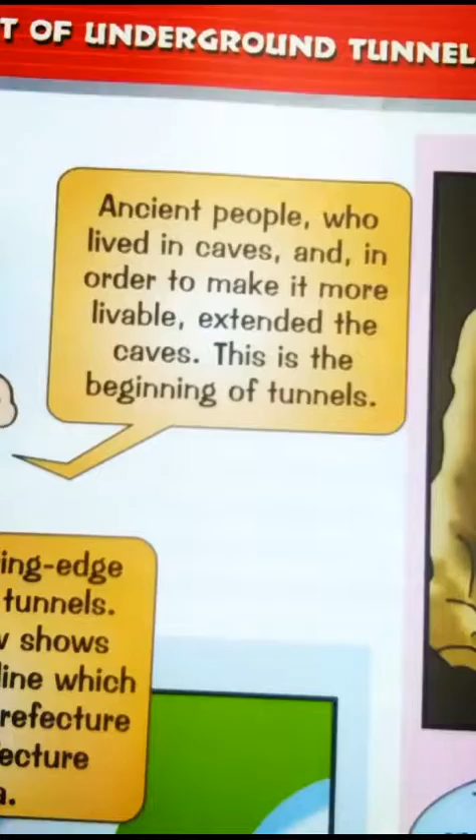Ancient people lived in caves and, in order to make them more livable, extended the caves. This is the beginning of tunnels. Since then, people have excavated tunnels in various settings. That was a cutting-edge introduction to tunnels. The chart below shows the Tokyo Bay Aqua Line, which links Kanagawa Prefecture and Chiba Prefecture across the sea.

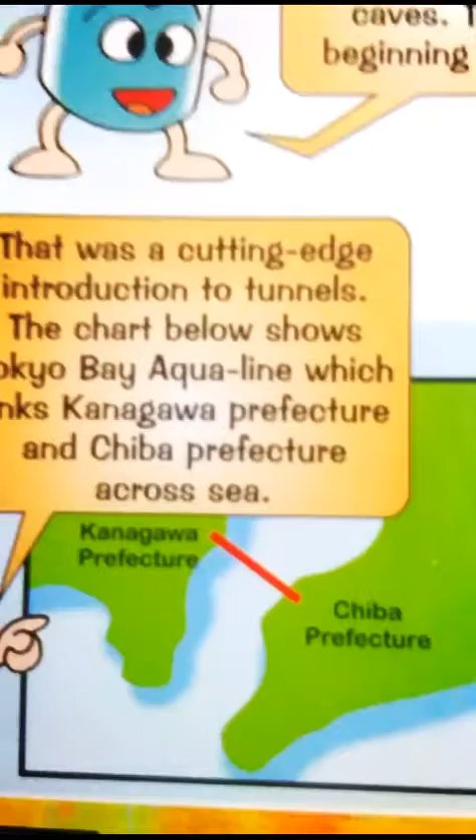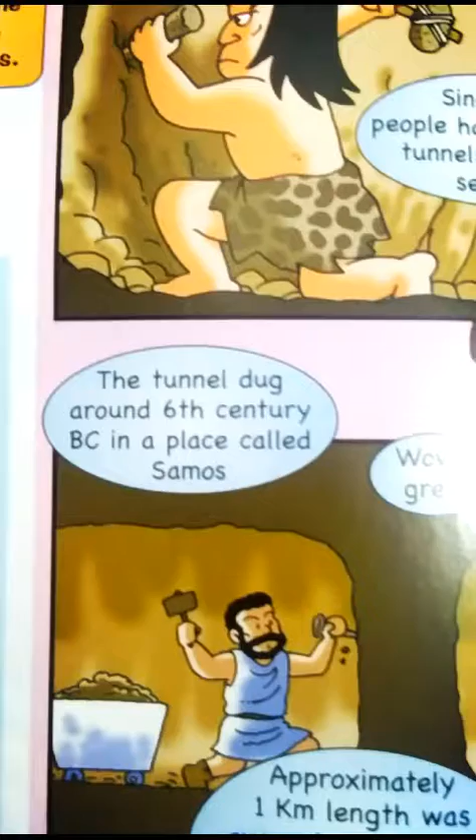A tunnel was dug around the 6th century BC in a place called Samos. Approximately 1 kilometer in length was excavated from both sides, which connected to each other perfectly. See the cross section of the tunnel. Not only roadways but also communication cables pass through the tunnels.

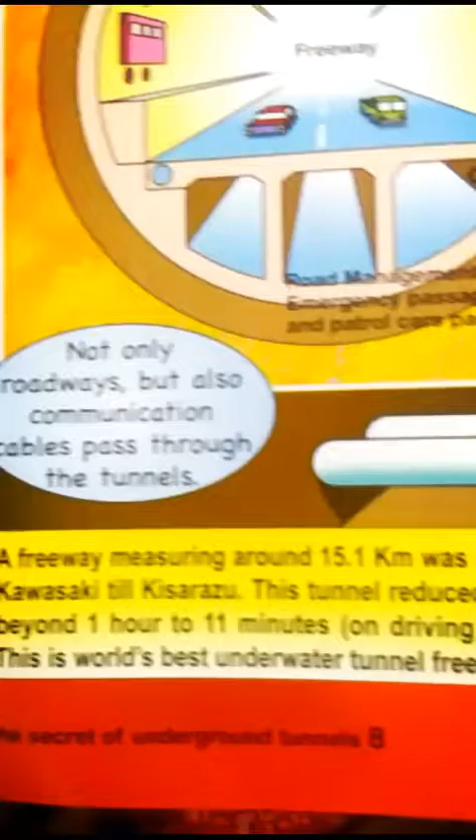A freeway measuring around 15.1 km was opened in 1997 from Kawasaki to Kisarazu. This tunnel reduced traveling time from over 1 hour to 11 minutes when driving at 80 km per hour. This is the world's best underwater tunnel freeway.

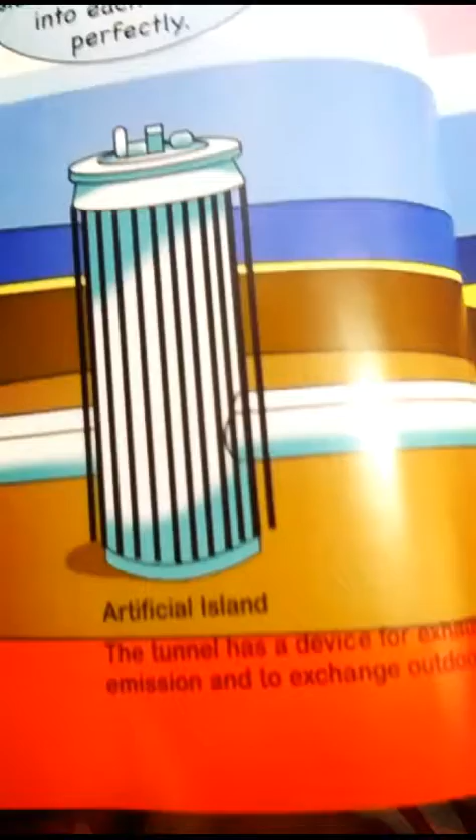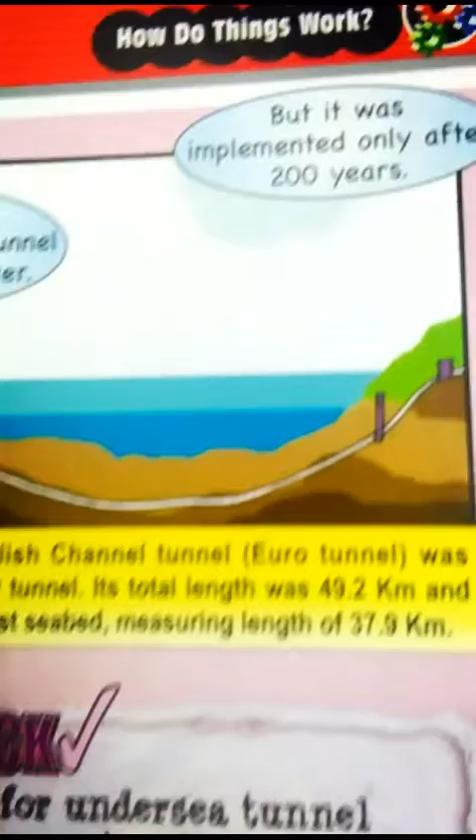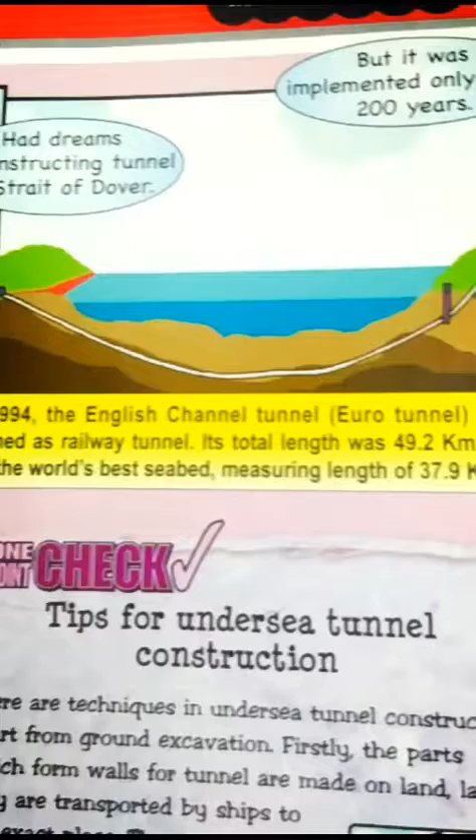French Emperor Napoleon had dreams of constructing a tunnel in the Strait of Dover, but it was implemented only after 200 years. In 1994, the English Channel Tunnel, Eurotunnel, was opened as a railway tunnel. Its total length was 49.2 km, and it is the world's best seabed tunnel, with an undersea length of 37.9 km.

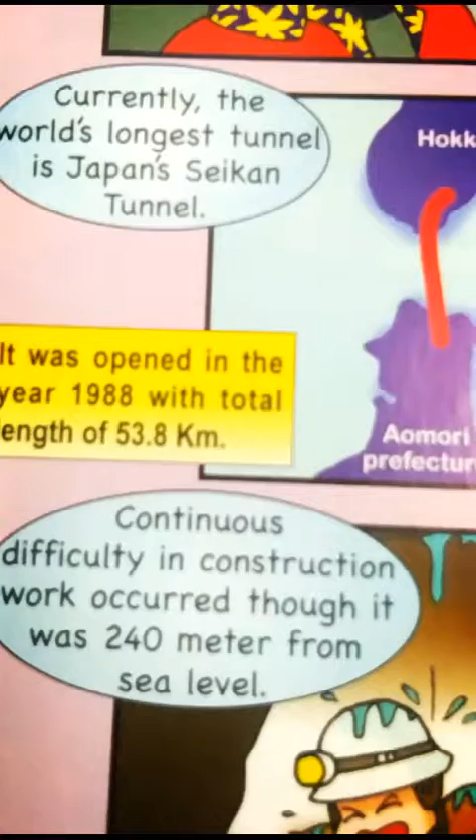Currently, the world's longest tunnel is Japan's Seikan Tunnel. It was opened in the year 1988 with a total length of 53.8 km. Continuous difficulty in construction work occurred, as it was 240 meters below sea level.

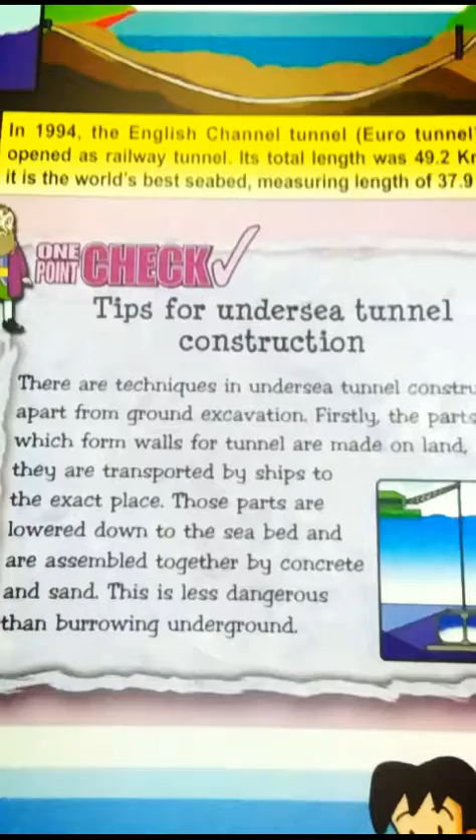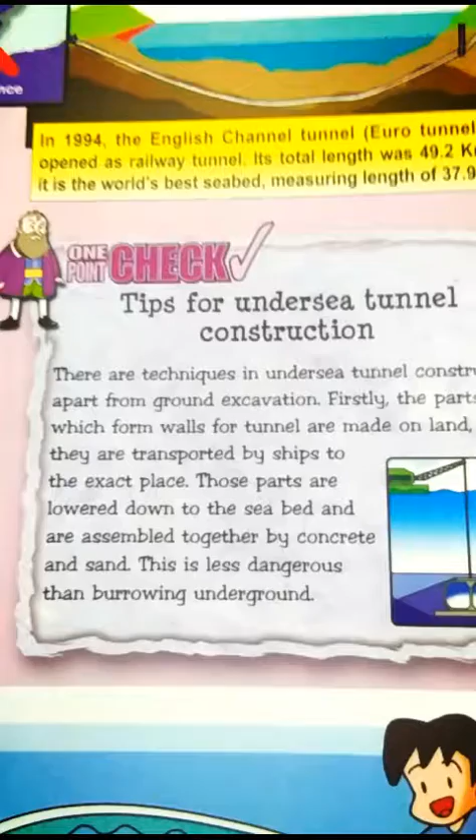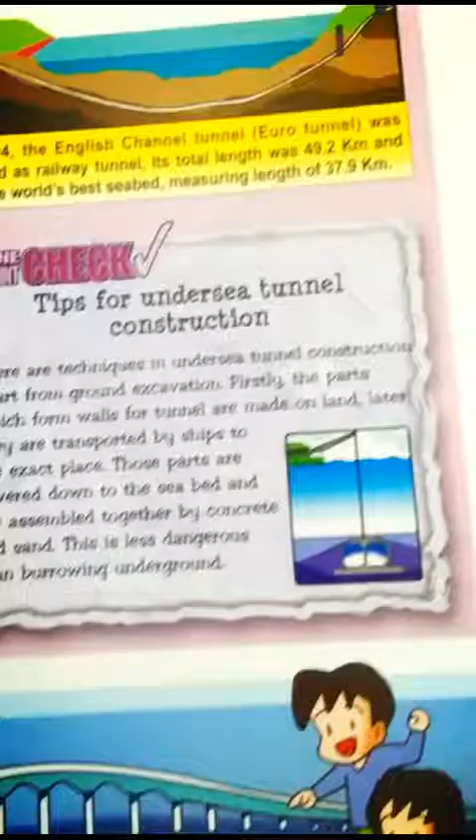There are techniques in undersea tunnel construction apart from ground excavation. Firstly, the parts which form the walls of the tunnel are made on land. Later, they are transported by ships to the exact place. Those parts are lowered down to the seabed and assembled together with concrete and sand. This is less dangerous than burrowing underground. With developments in technology, the length of tunnels is expanding.

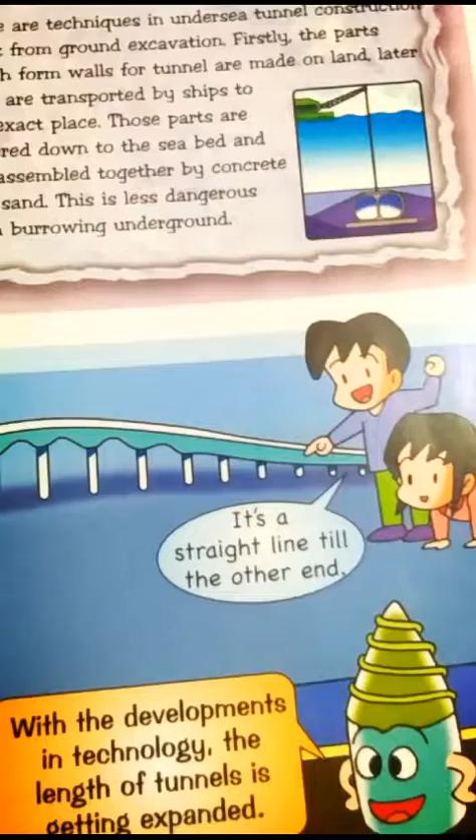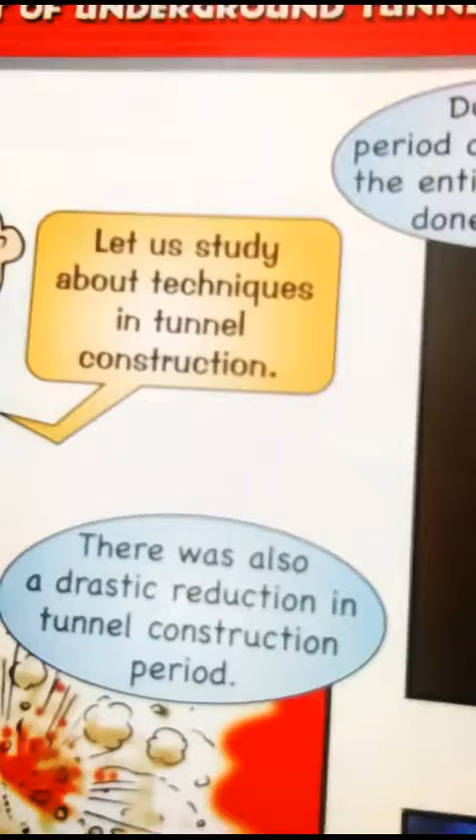The techniques in tunnel construction. During the period of no machines, the entire digging was done manually. It was tedious work which consumed time and labor over long periods. However, with the invention of dynamite, solid rocks could be easily collapsed. There was also a drastic reduction in tunnel construction period. But accidents like cave-ins could not be avoided.

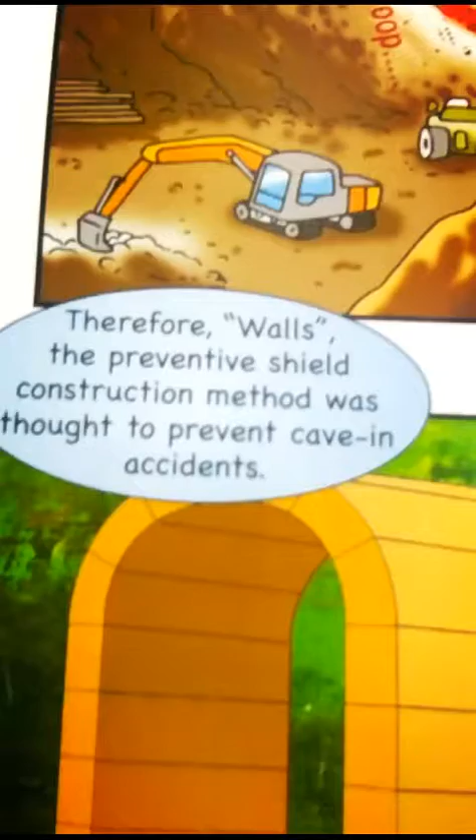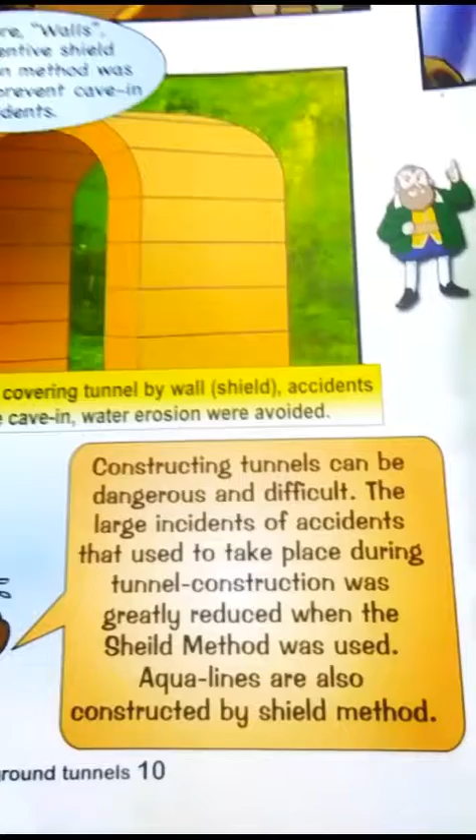Therefore, the preventive shield construction method was devised to prevent cave-in accidents. By covering the tunnel with a wall shield, accidents like cave-ins and water erosion were avoided. Constructing tunnels can be dangerous and difficult. The large incidence of accidents during tunnel construction was greatly reduced when the shield method was used. Aqua Lines are also constructed by the shield method.

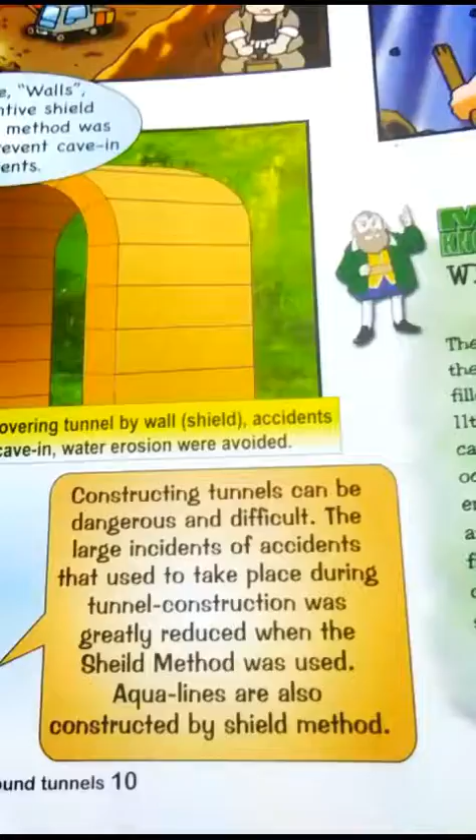Why should signals be there at the entrance? The most frightening thing about a tunnel is the incidence of a fire. When a tunnel gets filled with smoke, there is little way out. On 11th July 1979, inside the Tomei Expressway, 6 cars collided and a massive fire accident occurred. If signals had been provided near the entrance, such an accident could have been avoided. When fire accidents occur, the signals turn red and the succeeding cars are instructed to stop.

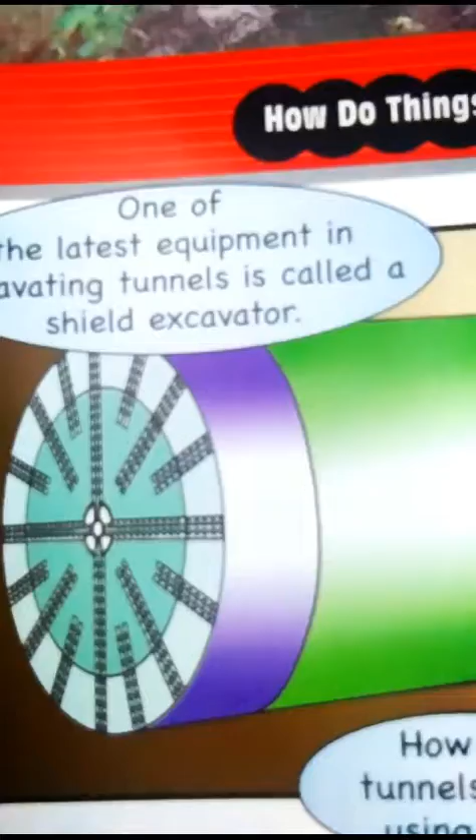Let us understand the mechanism of the latest technique called the shield method. One of the latest pieces of equipment in excavating tunnels is called a shield excavator. Firstly, the cutter head at the front is rotated; it digs a hole and then proceeds. The dug soil is pushed aside by conveyor and pipe, and this is transported above ground.

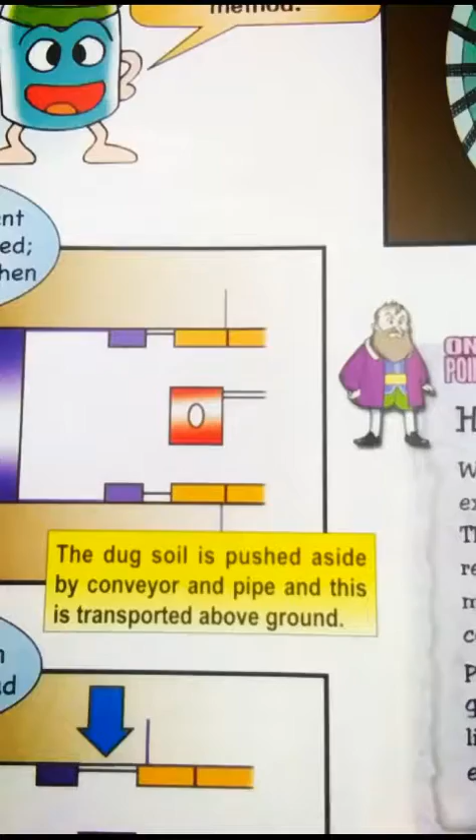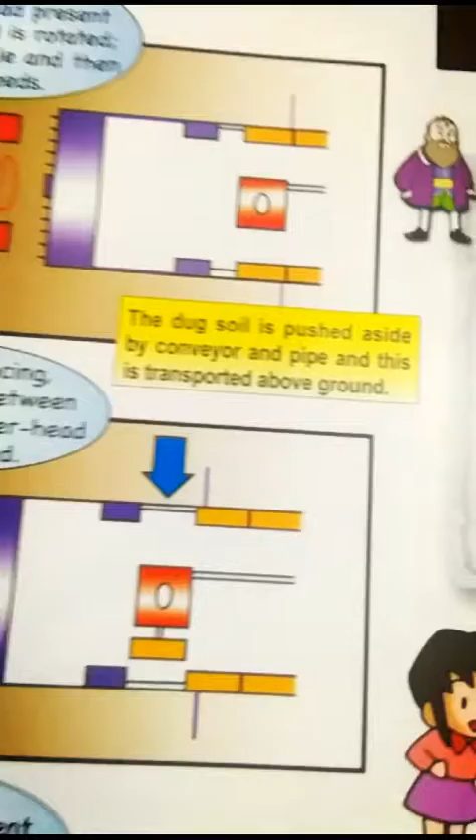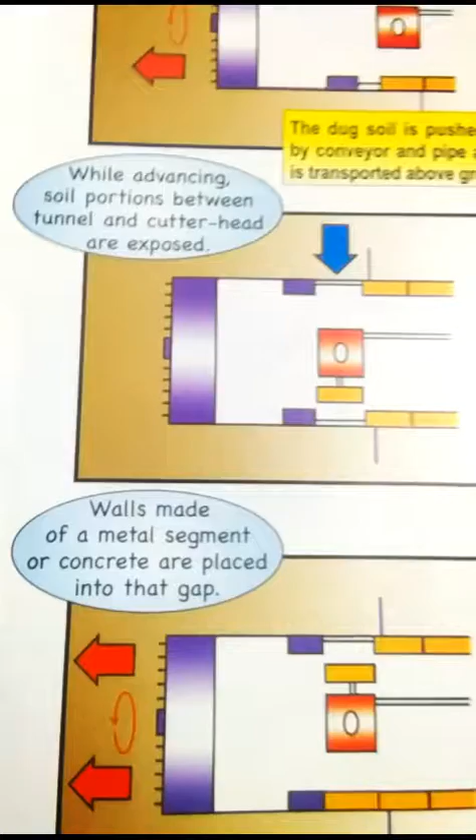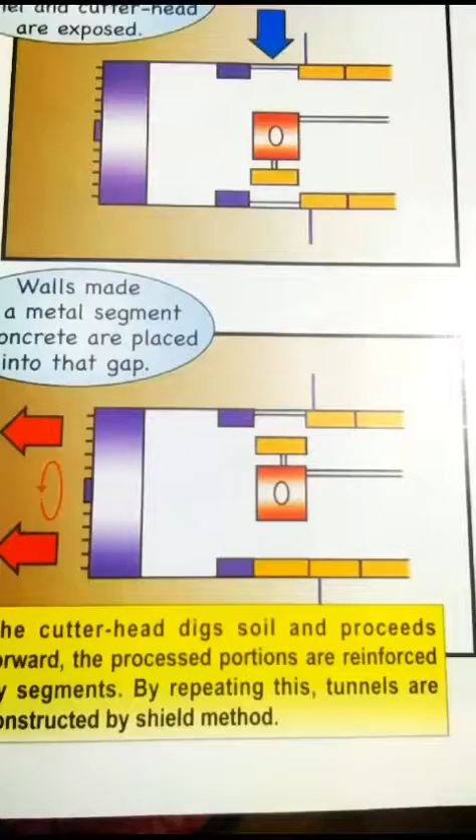While advancing, soil portions between the tunnel and cutter are exposed. Walls made of metal segments or concrete are placed into that gap. The cutter head digs soil and proceeds forward. The processed portions are reinforced by segments. By repeating this, tunnels are constructed by the shield method. Due to the shield method, tunnels are remarkably durable and thus less destructible.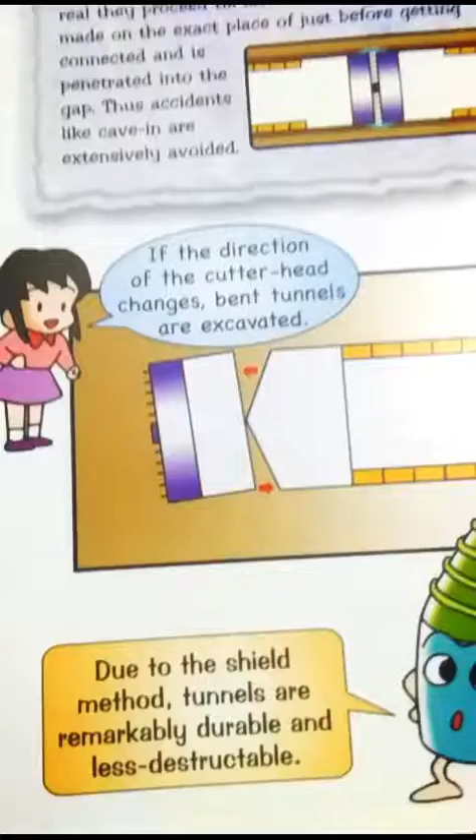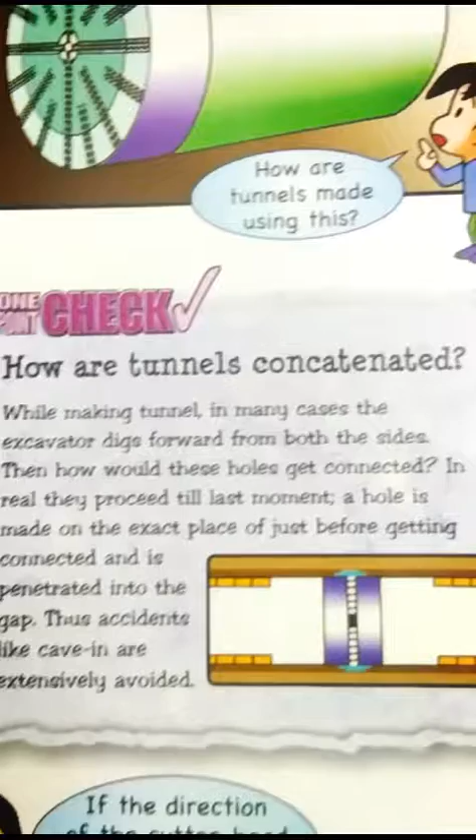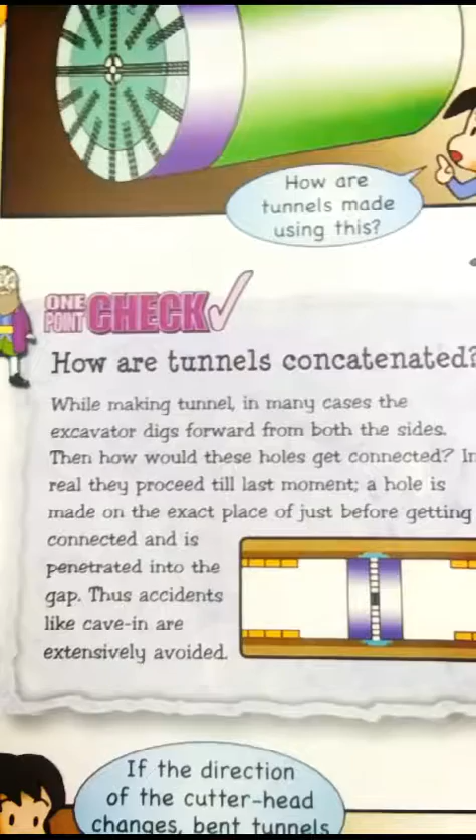How are tunnels concatenated? While making a tunnel, in many cases, the excavator digs forward from both sides. Then how would these holes be connected? In reality, they proceed until the last moment. A hole is made at the exact place just before getting connected and is penetrated into the gap. Thus, accidents like cave-ins are extensively avoided. In present times, underground construction work utilizes this shield method.

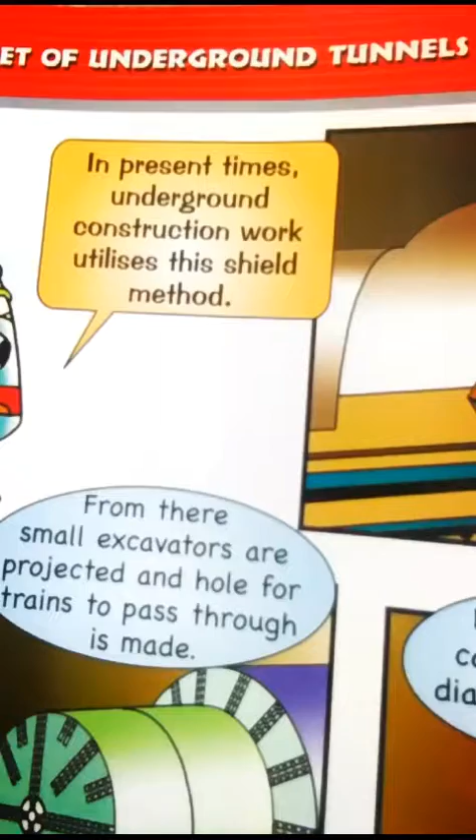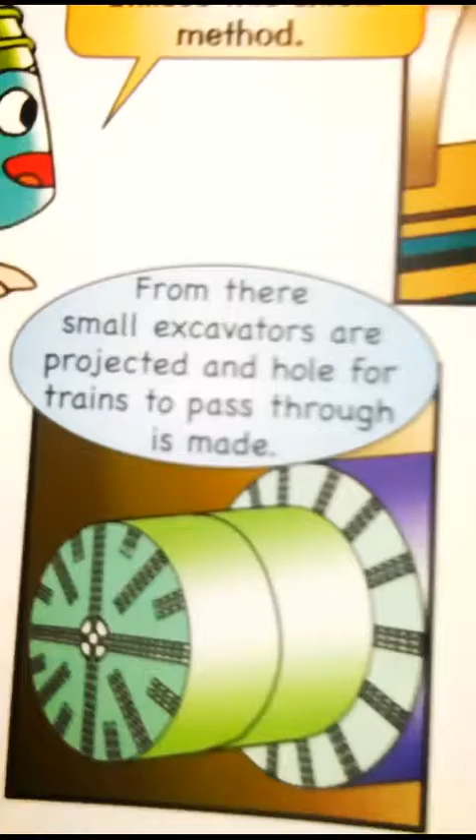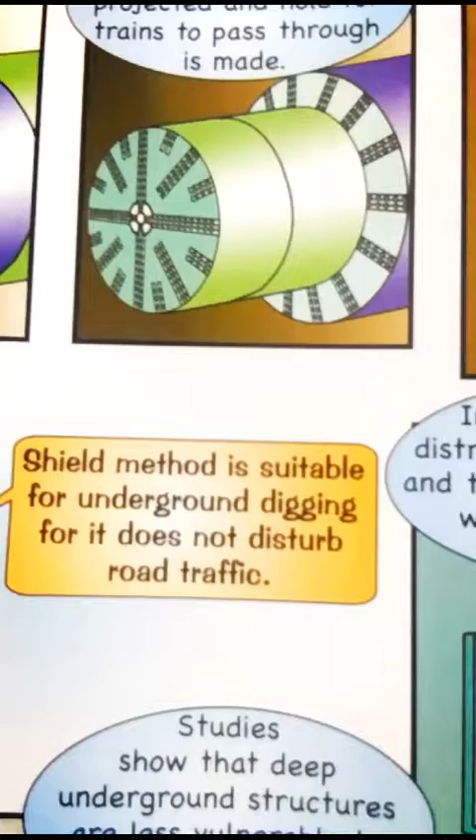In underground tunnels, there are stations and height differences. Wide holes for stations are made by huge excavators. From there, small excavators are projected and a hole for trains to pass through is made. Excavators can excavate diagonally also. In the case of stairs, diagonal digging is done downwards. The shield method is suitable for underground digging because it does not disturb road traffic. In many cases, the distribution of electricity, telephone and other utility wiring takes place underground.

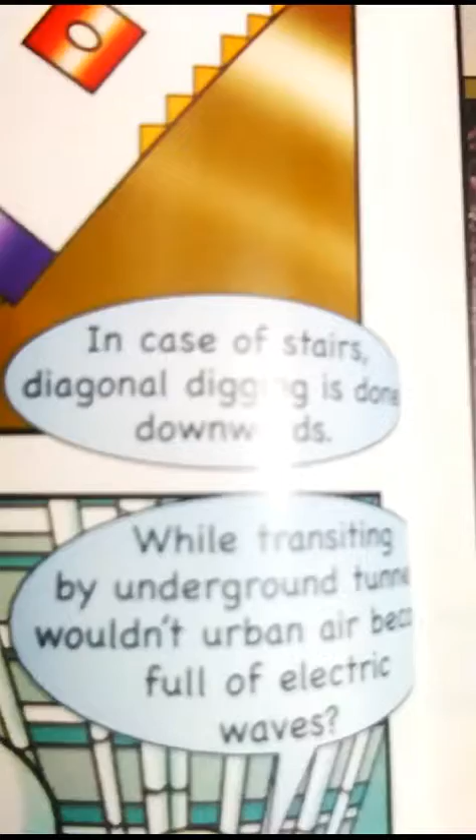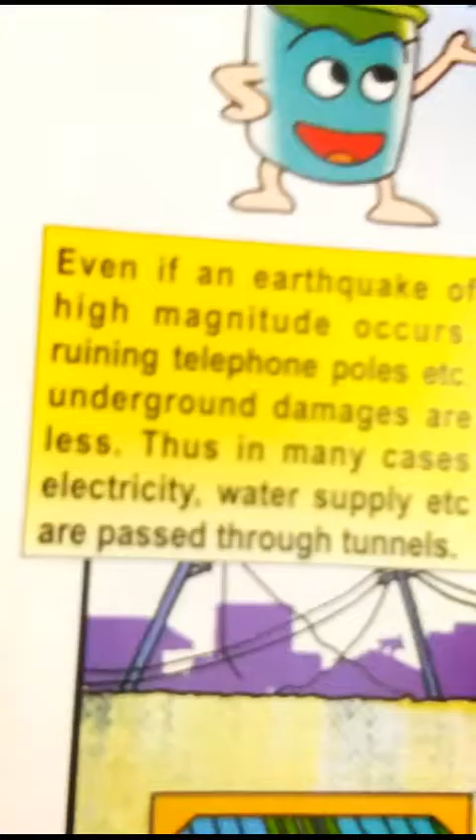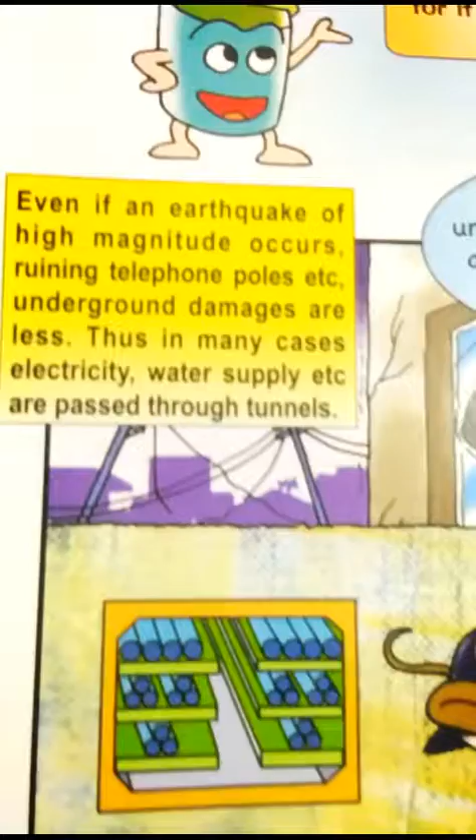While transiting by underground tunnel, wouldn't urban air become full of electric waves? That's the question. Even if an earthquake of high magnitude occurs, ruining telephone poles, etc., underground damage is less. Thus, in many cases, electricity, water supply, etc., are passed through tunnels. Studies show that deep underground structures are less vulnerable to earthquake tremors. There are many tunnels running under our feet. It can be said that the underground of a city is full of tunnels.

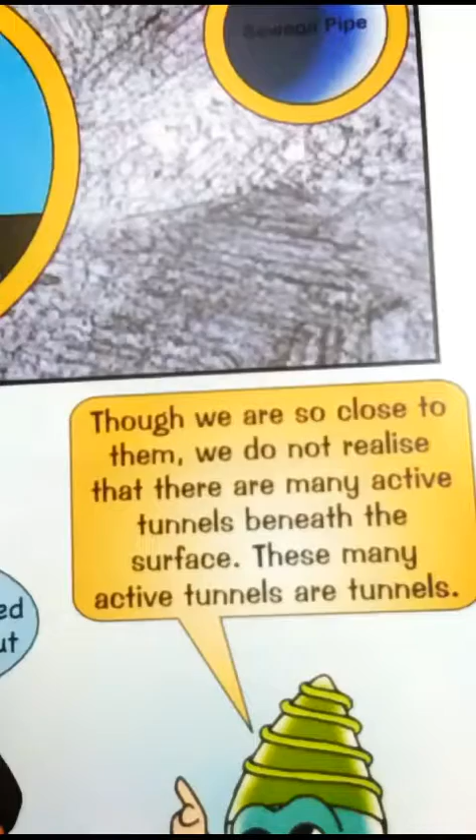See. Underground reservoirs help to collect water during floods and heavy rains. Later, when the rain stops, the stored water is pumped out to rivers. Though we are very close to them, we do not realize that there are many active tunnels beneath the surface. These many active tunnels are tunnels.

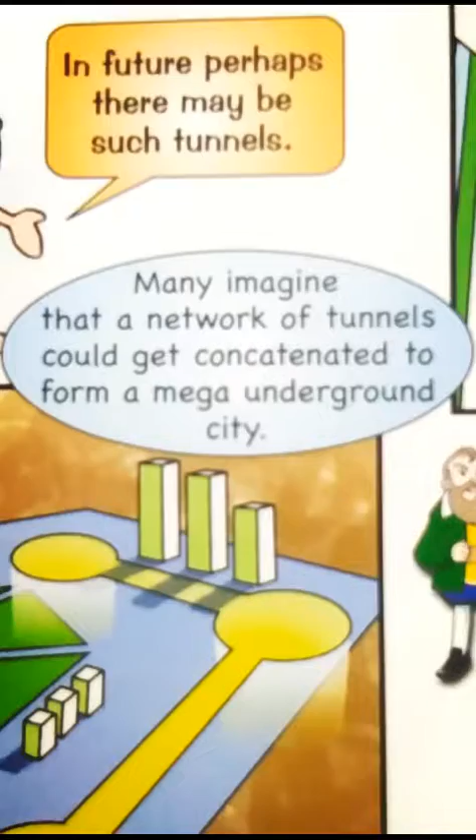In the future, perhaps there may be such tunnels: streets of an underground city inside a massive tunnel. Many imagine that a network of tunnels could get concatenated to form a mega underground city due to tunnel extension. Plans have been devised to construct underground atomic energy plants. In that case, who knows, someday perhaps planes may fly through tunnels.

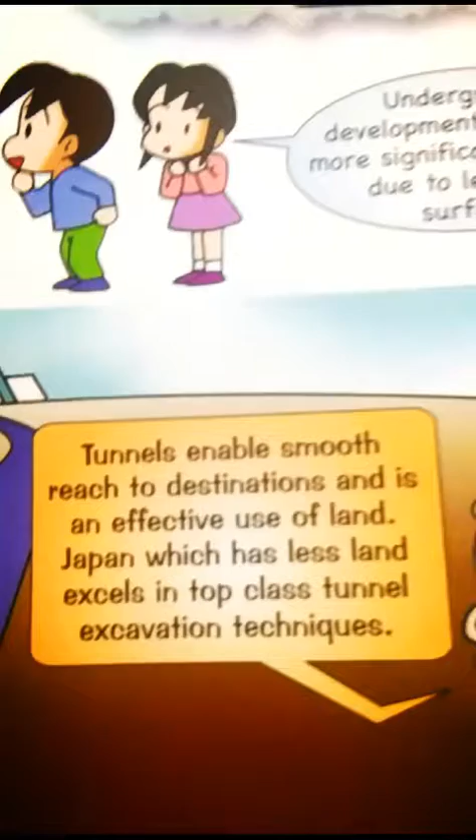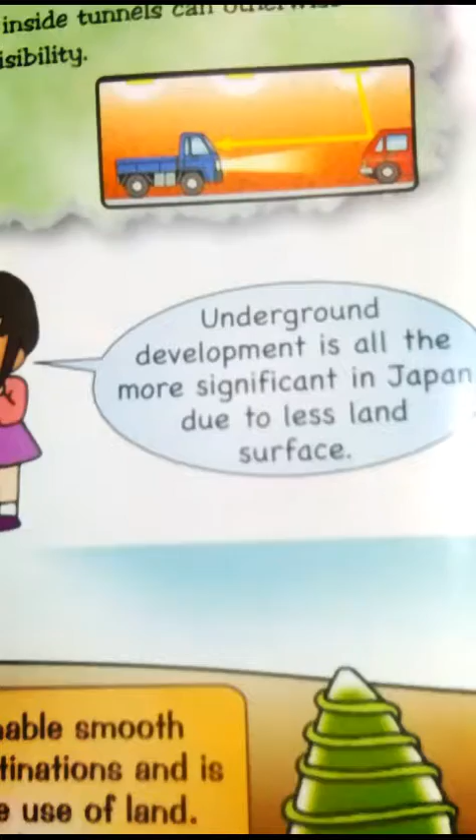Tunnels enable smooth reach to destinations and effective use of land. Japan, which has less land, excels in top-class tunnel excavation techniques. Underground development is all the more significant in Japan due to less land surface.

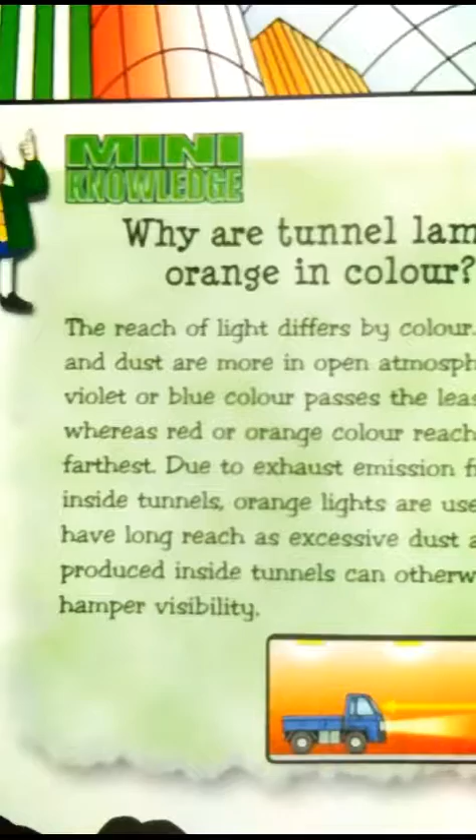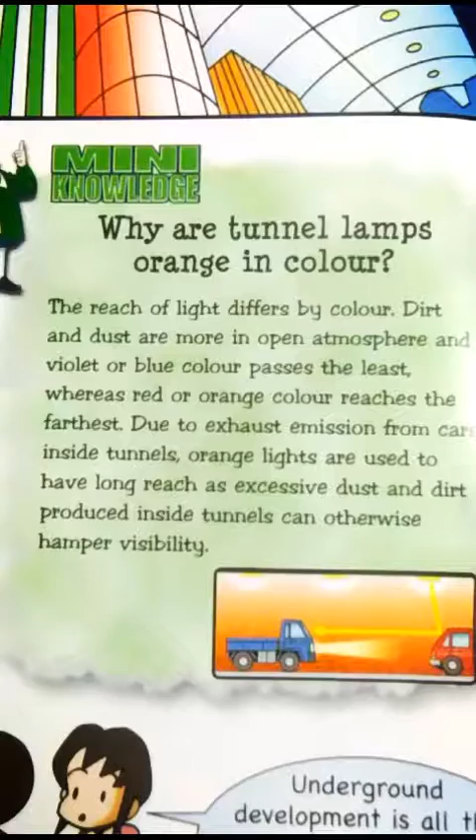Why are tunnel lamps orange in color? The reach of light differs by color. Dirt and dust are more in the open atmosphere, and violet or blue color passes the least, whereas red or orange color reaches the farthest. Due to exhaust emissions from cars inside tunnels, orange lights are used to have long reach, as excessive dust and dirt produced inside tunnels can otherwise hamper visibility.

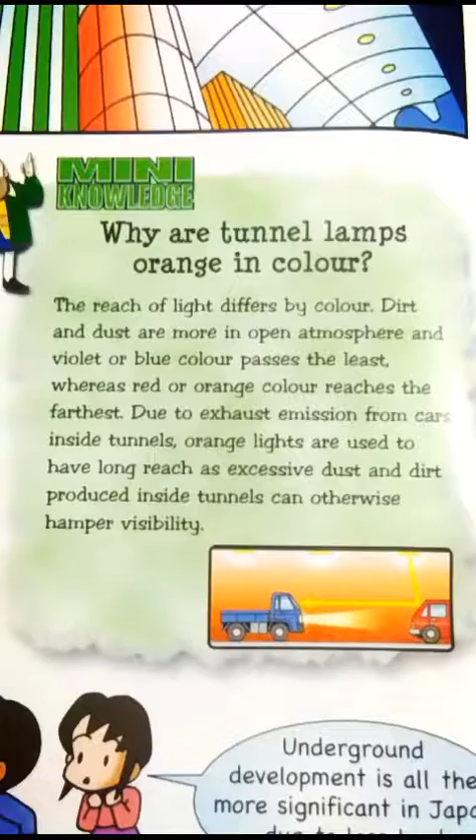I think this will be very informative to you. This is from the book I Get It. All you want to know.